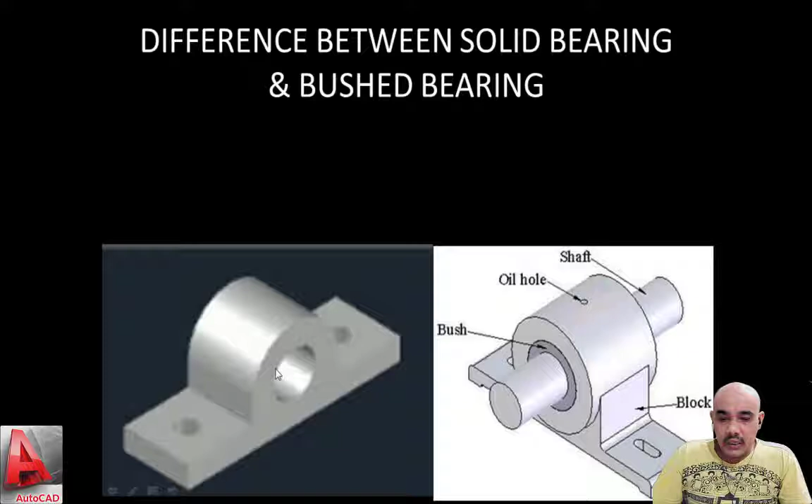In our previous lecture we have done solid bearing, and let's look at the difference between the solid bearing and the bushed bearing. This is the solid bearing. The solid bearing is of no use after it is worn out. But in a bush bearing, only the bush is replaced, and we again use the bearing.

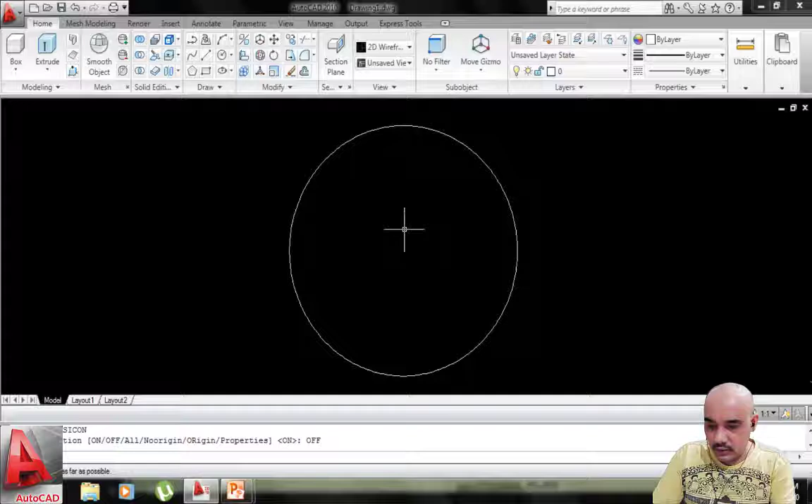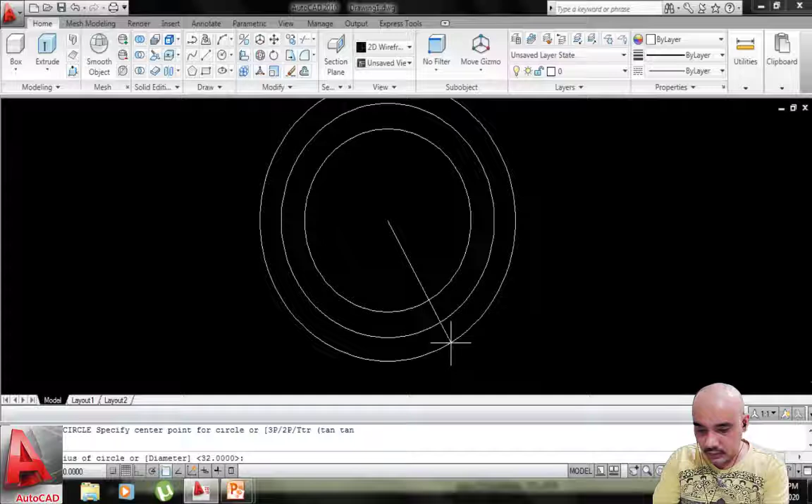I opened the AutoCAD interface. This is the interface of AutoCAD. Let's draw a circle of dia 50. Okay, let's turn the UCS icon off. Z enter, A enter for zoom in, zoom out, and draw another circle of dia 64, and draw another circle of dia 96. We have drawn these 3 dias.

Okay, then draw a center line here. Let's switch the ortho on. Draw this line, offset to the distance of 35, and again offset the distance of 25. Okay, and draw a center line here, offset 160 divided by 2. Okay, then we have drawn this. Let's extend this. This is 35, this is 160. We have prepared this diagram, and after this offset of 35.

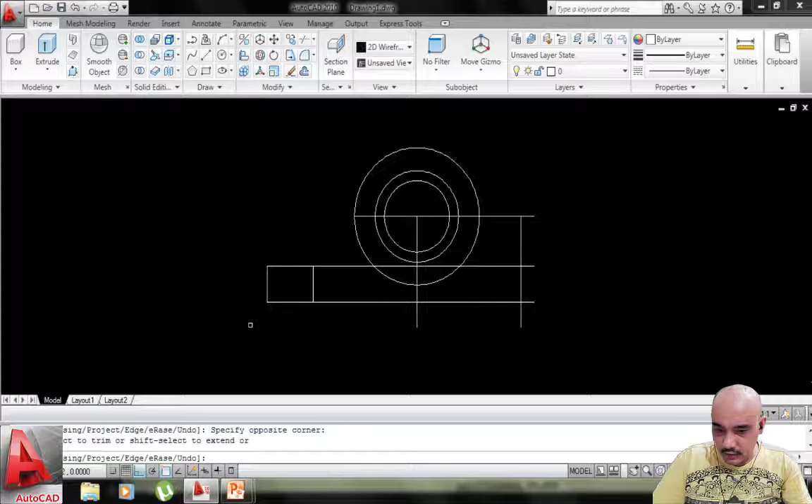Okay, and extend these lines to this boundary. Then trim the necessary lines. And similarly offset a distance of 35 from this side also, extend this line to this boundary and trim the unwanted lines. Okay, we have prepared this.

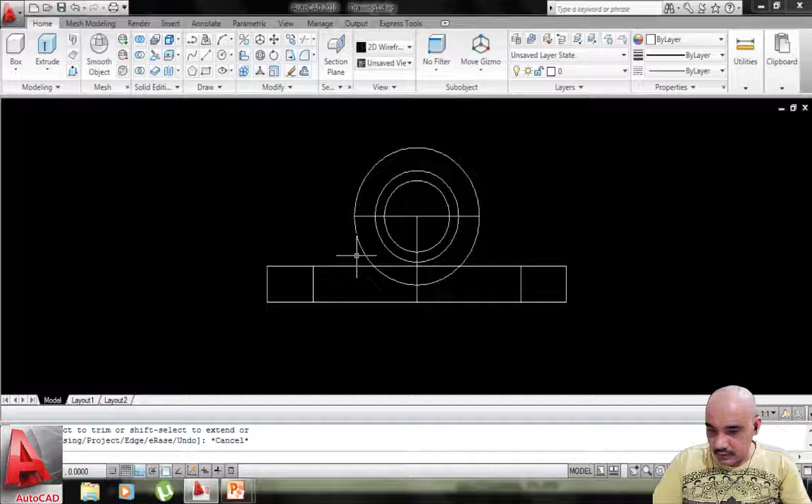After this, draw a line here. Then fillet, specify radius of 6, and the 6 radius fillet is drawn. Again the line is drawn from this end point to this point, and again fillet radius 6. Okay, we have prepared the front view of the bushed bearing.

After this, extend this line: EX, enter, select this boundary, space. The line is extended to this circle boundary. After this, offset of 4 and offset of 2.5 to draw the oil hole.

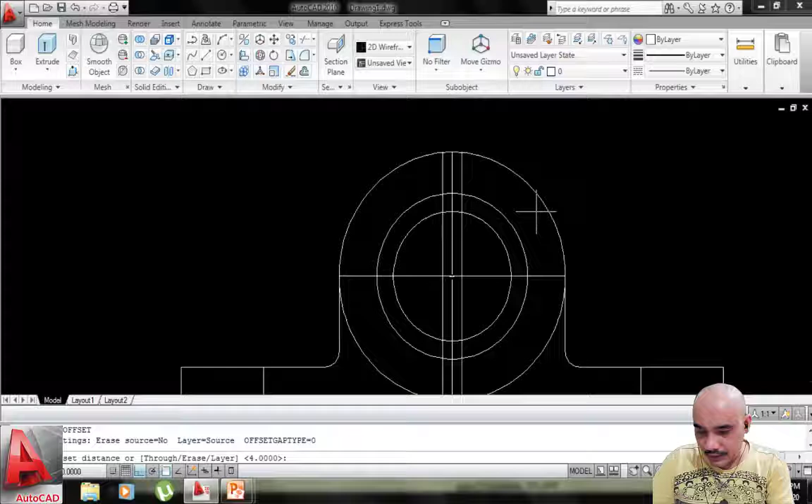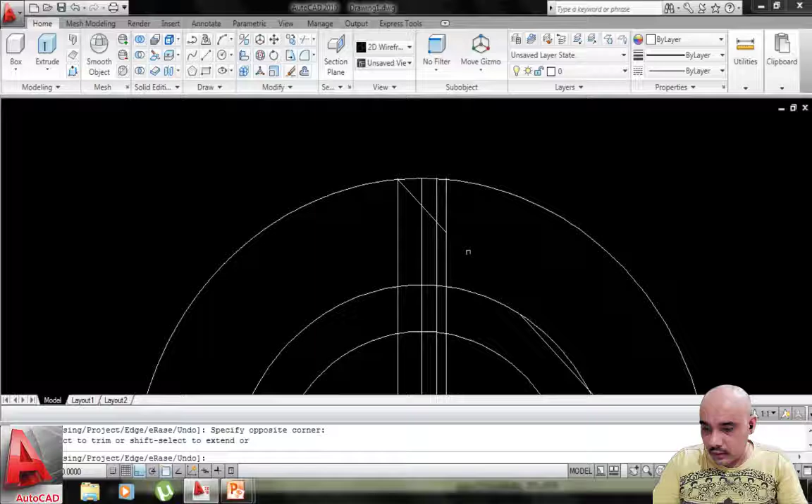Draw a line XL at angle minus 45 degree, put it here, trim the necessary line and delete this line. Again we have used the mirror command here, trim this line also and delete this line. After this we use the mirror command and trim the necessary lines, and the oil hole is drawn.

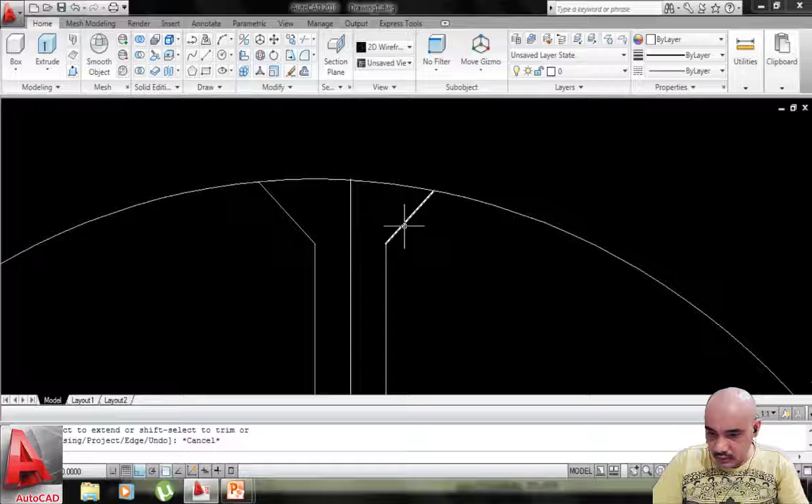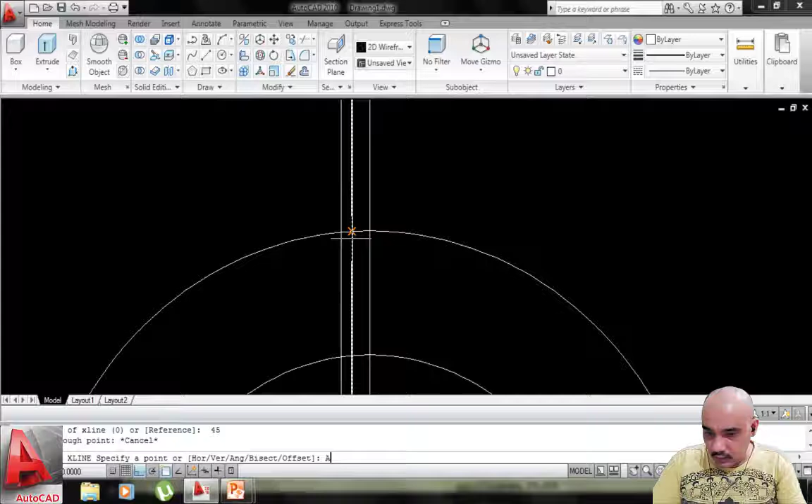Okay, let's extend this. Just wait. Draw this center line. This is not from the center. This is the center. Offset of 2.5 and offset of 4. Just erase this. Again use XL, angle minus 45 degree. Put this point here and trim the necessary line. Delete this and trim this up to this point. Okay, then mirror.

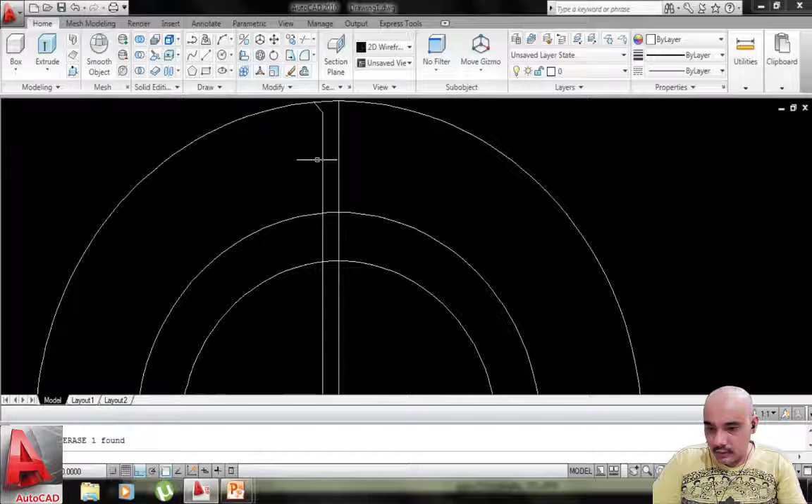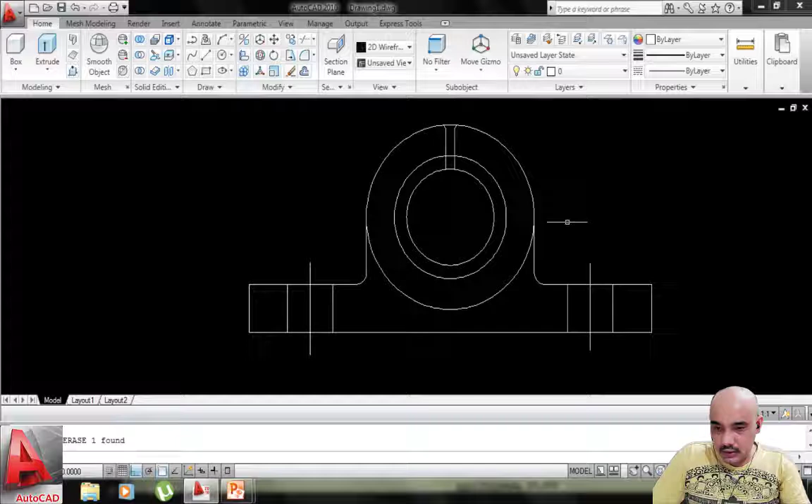Select the object. We have to use this hatching. We have to just draw the line of section. The preview is not clear, so we have to increase the value of the scale. In user defined, I have to use custom spacing.

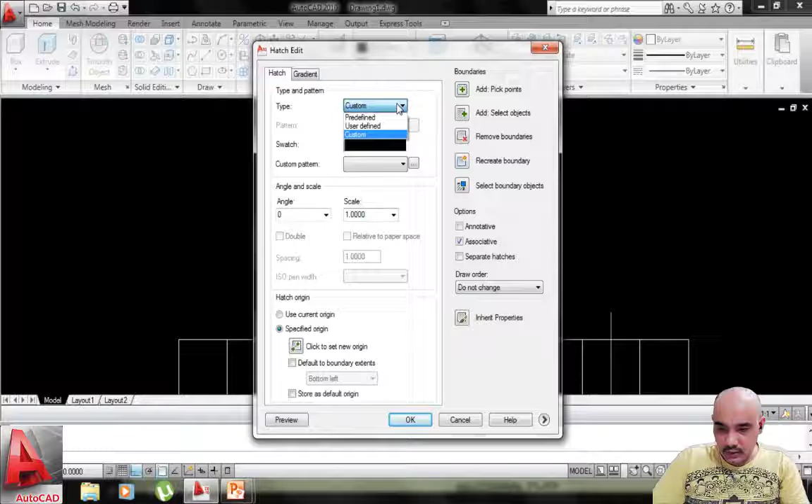And this sectioning is done here, and next we have to section, just offset the distance of 3, okay, and trim this line, just offset about, this is 76, so we have to offset. We have to draw a line here, XL angle of 45 degree, just put it here.

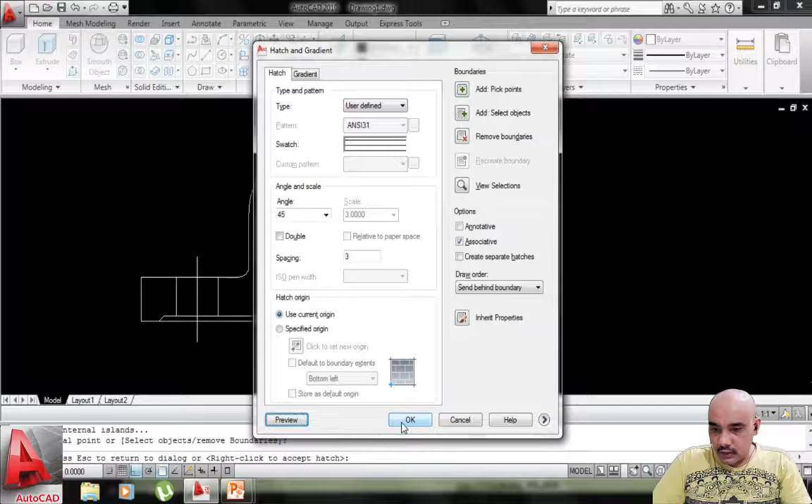And preview. Sectioning is done. Okay, now this is the different material, and this is cast iron, this is gunmetal. So with sectioning we have to show two materials. Then again go to sectioning, change the angle 45 to minus 45 and just preview. In this way we can show two different materials with the help of sectioning.

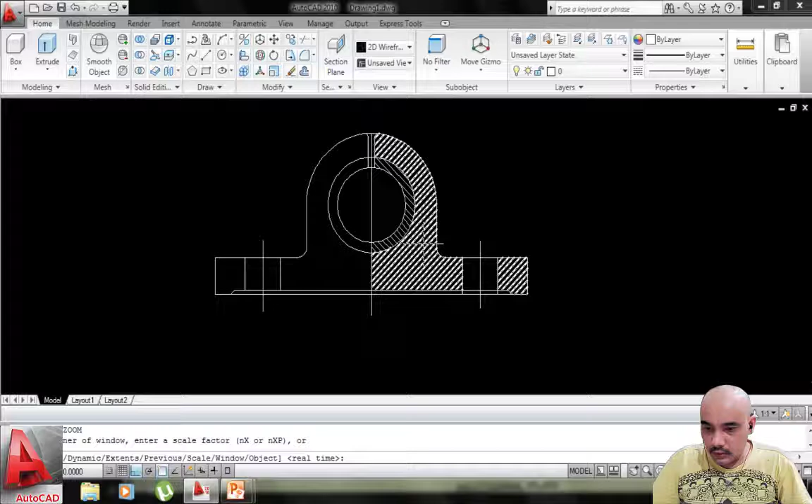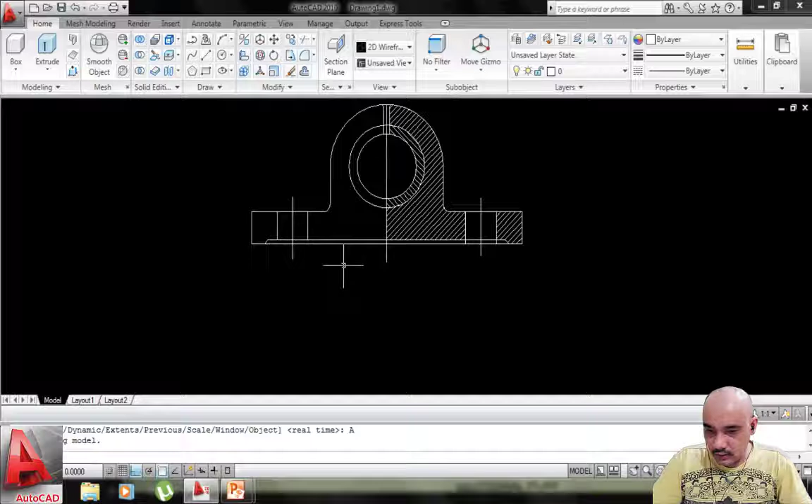With the help of line we can project projections. Just draw the projections from the circles. Okay, and draw this projection also.

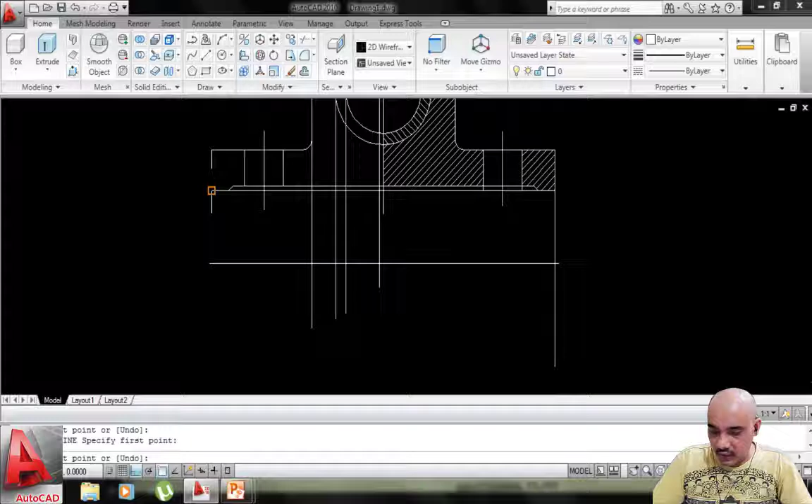This distance is 76, this distance is 76 and this distance is 96. So we have to draw this, offset the distance of 76 and extend these lines to this boundary. Okay, and trim these lines as these lines are of no use.

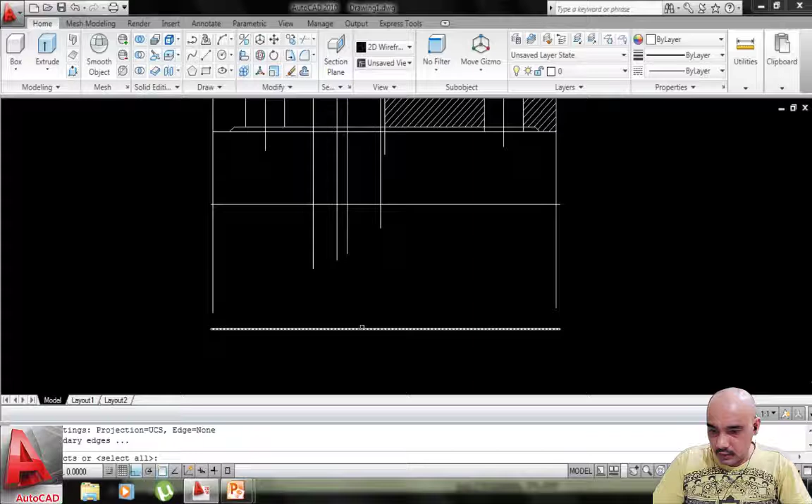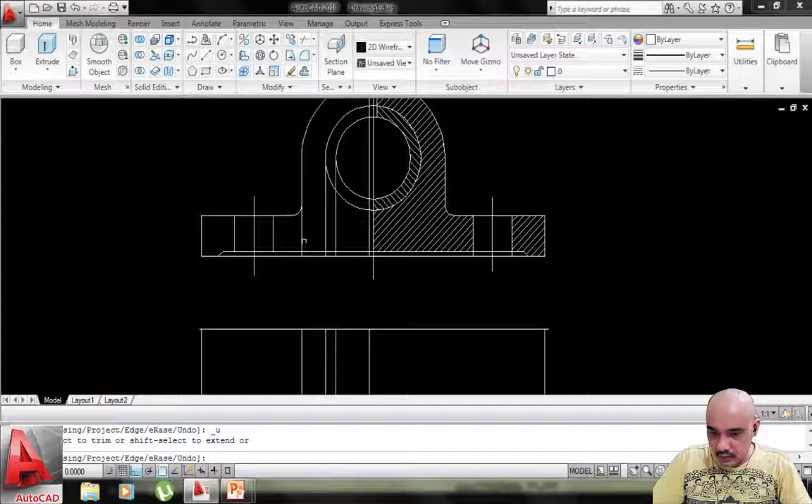Okay, then again mirror about this. We have to show the section as we have a sectional plane, so we have to show these lines in section view. Again go to hatching, use 45 degree, pick point, preview. And we have to show the different material here, the bush which is made of gunmetal. Again hatching, change the angle to minus 45 degree, click this and preview. Okay.

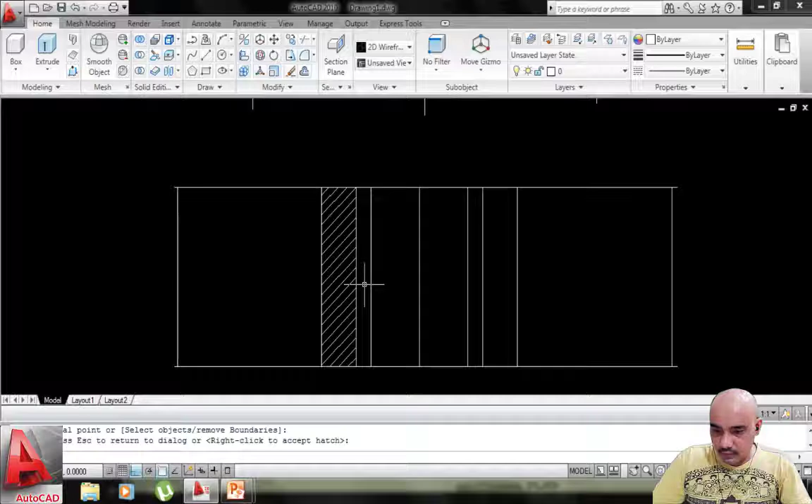We can erase these lines and directly mirror this. Okay, then this is 76 but this length is 96, so we have to offset 10 more on both sides, offset of 10 to this side and to this side, and again extend these lines to this boundary.

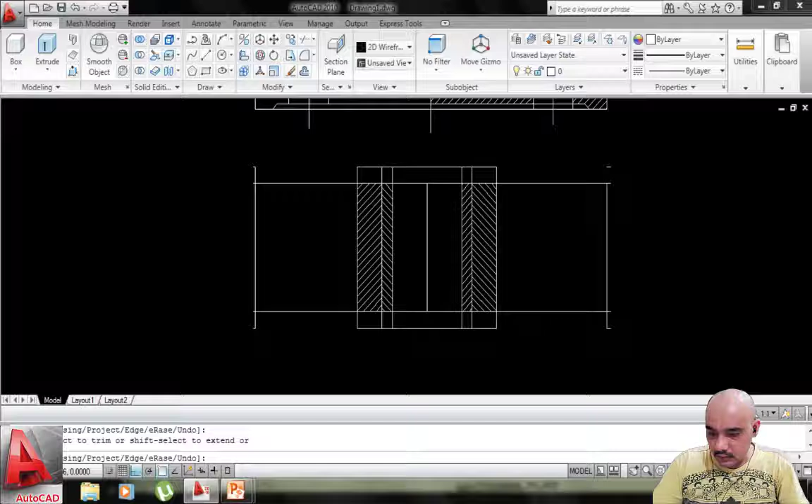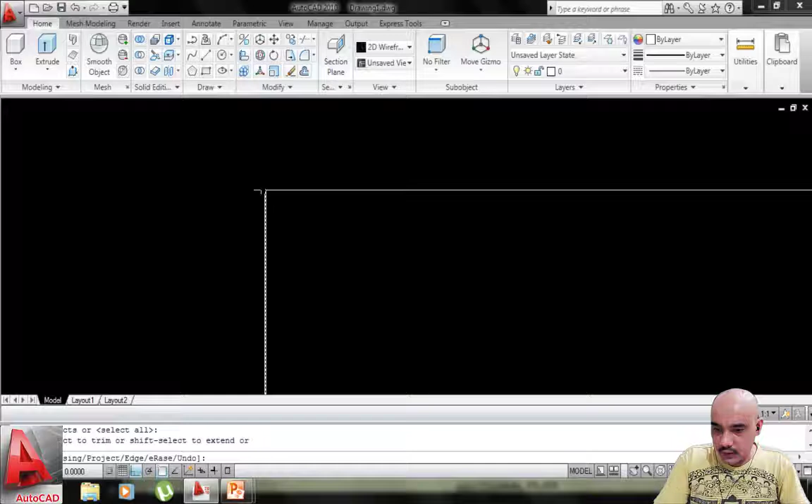Okay, then trim this, this, trim this. Okay, and we have to section this also, so we have to erase this, as we forgot this step before doing hatching.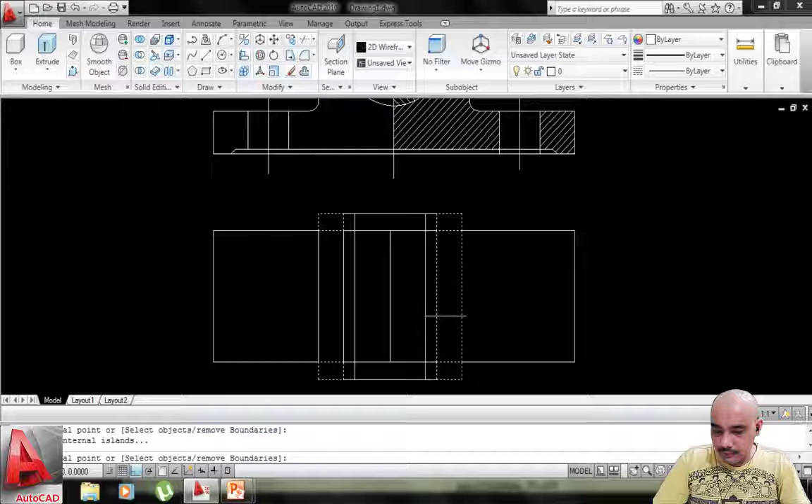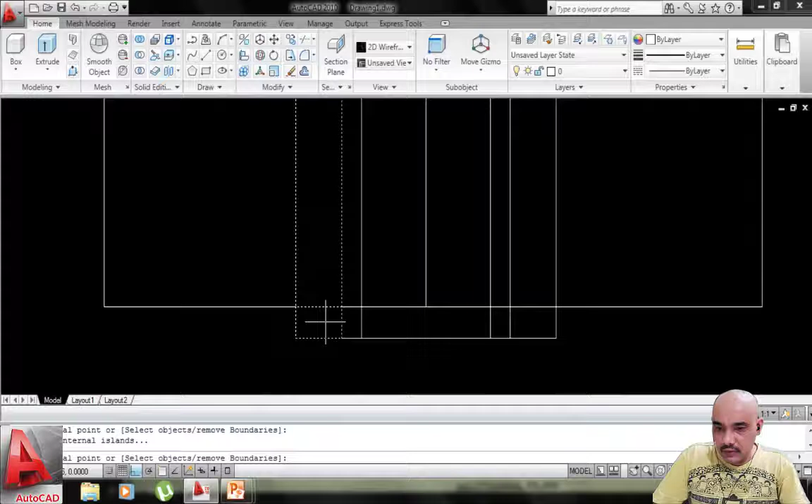Okay, and again minus 45 degree. And again use this command, put 315 or minus 45 degree. Okay, in this way we can draw this.

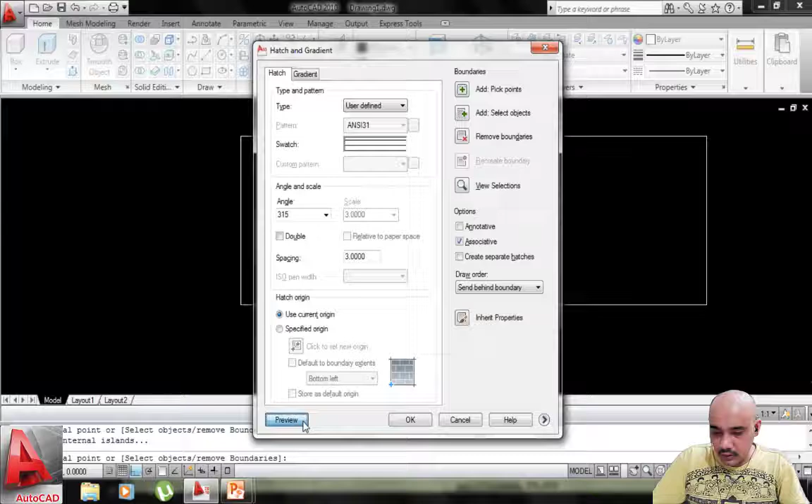Now take the projection of these. This is the projection here, and with its help we can draw this. Draw the center line, offset of 8 on both sides. Okay, and this. And just trim.

We have to draw the circle, tangent, tangent, tangent. Again draw this circle, and trim.

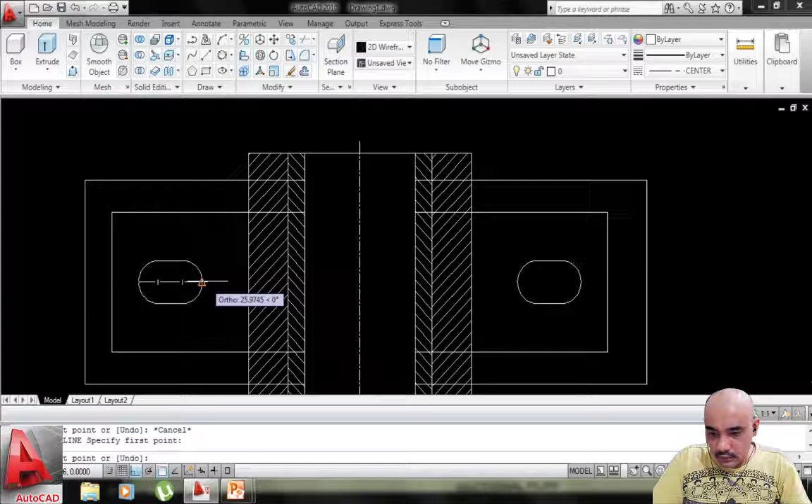ये भी सेंटर ठीक है। अब थोड़ा सा इसको हम कलर, अगर कलर चेंज करना हो तो कलर भी आप दूसरी तरह सेंटर का दे सकते हैं।

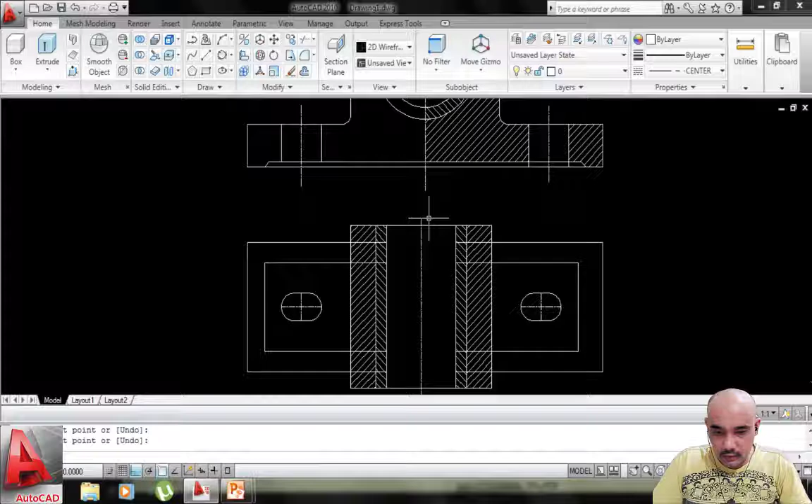सभी लाइंस को सिलेक्ट कर लो, बाय लेयर में जाकर ग्रीन कलर कर दो, तो जो सेंटर लाइन है वो हमें ग्रीन कलर में दिखने लगेगी। अब जो ये हिडन है, इसको हिडन लाइन से शो करना है। अगेन अदर में जाना है,

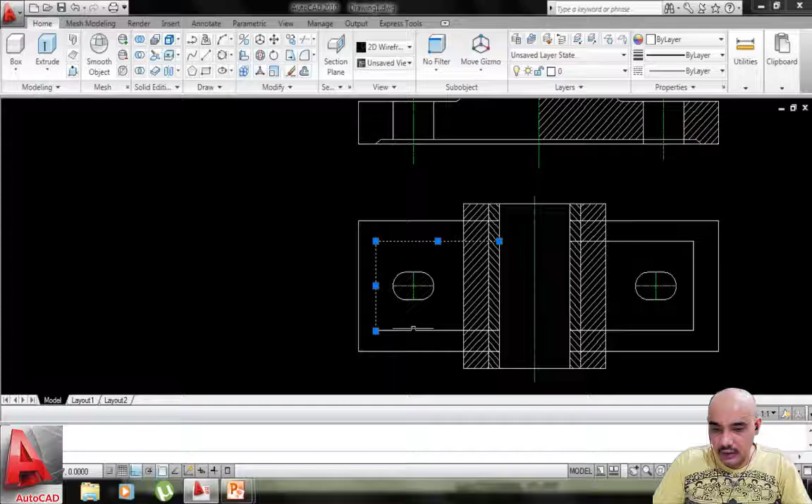लोड में जाकर हिडन, ओके, दिस इज हिडन। शो डिटेल्स में जाकर ग्लोबल स्केल फैक्टर को इन कर दो, ठीक है। अब इसको जो हमने हिडन करनी है इसको हम हिडन से जस्ट क्लिक ऑन दी लेयर एंड मेक इट हिडन, ठीक है, ये हिडन है। अब इसकी तरफ से ये भी हिडन होगी, ठीक है।

ठीक है, क्योंकि वो लाइन स्प्लिट करनी पड़ेगी। ये हिडन हो गई और इसको भी बाय लेयर्स में जाकर इसको भी। अब इसका भी कलर हम चेंज कर सकते हैं हिडन का। जस्ट सिलेक्ट दी हिडन लाइंस,

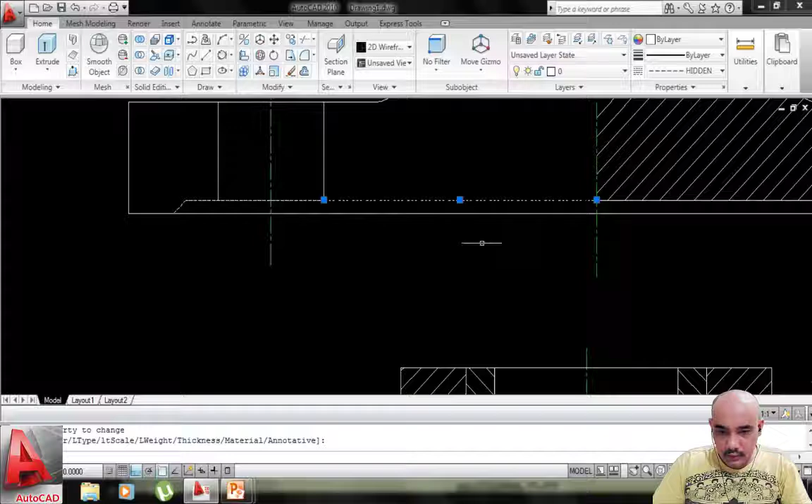Just select and change the color to blue. These are the colors, ठीक है।

और यहाँ पर हमने फिलेट लगानी थी, इसको कर देते हैं फिलेट रेडियस 6।

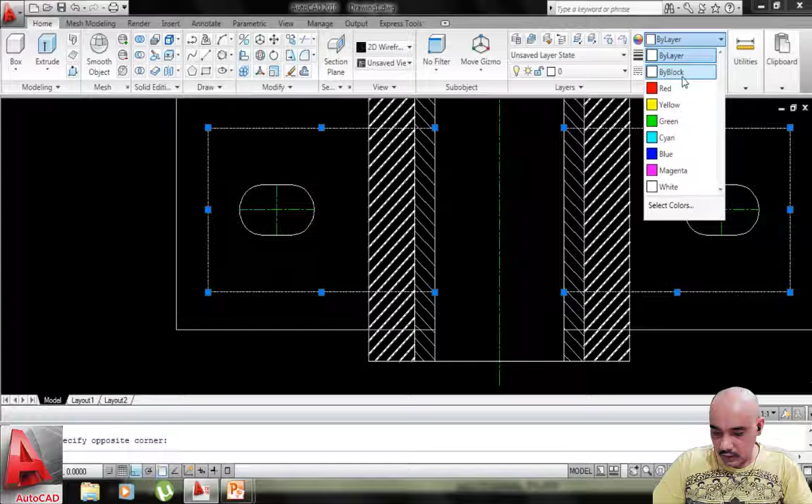अब देखिए ये प्रॉब्लम आ गई है। अब क्या मैं करूँगा, इसमें एक सर्कल हमारे पास ऑप्शन है TTR, इससे टेंजेंट और रेडियस 6, ठीक है। इसको हम कर लेते हैं कंटिन्यूअस।

अब इसको ट्रिम कर दो, ठीक है, ये गया, ये लाइन को ट्रिम किया। और सिमिलरली अब मिरर कर दूंगा, मैं दोबारा नहीं लगाऊंगा। एक सेंटर से यहाँ मिरर हो गया, ठीक है। अब इसको ट्रिम कर देंगे, ठीक है।

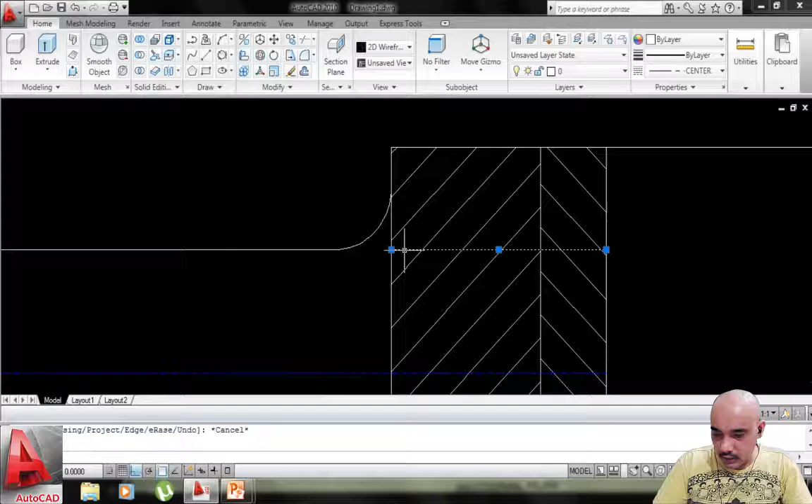ये लाइन एक्स्ट्रा है, इसको डिलीट कर देंगे। फिर हम मिरर यूज कर लेंगे, ये और ये। क्लिक किया, सेंटर लाइन से मिरर किया, ओके। ट्रिम कर दो इसको,

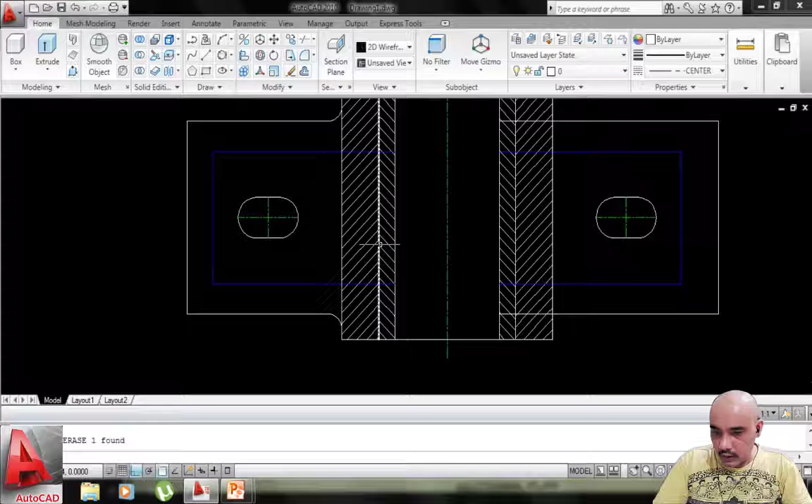दे दिया, और ट्रिम दिस आल्सो, ठीक है। ये हमारा व्यू तैयार हो गया। इसी तरह आपने इसको शीट पर बनाना है

और ऑटोकैड पर भी प्रैक्टिस कर सकते हो, ठीक है। अब इसकी डायमेंशनिंग कर लेते हैं हम।

First of all we have to do the center distance, this is the, we have to change this to continuous and linear.

The dimension size is very small, text size is very small, so press D. A dimension style manager is open. Go to modify command, go to text and increase the size to 5, okay.

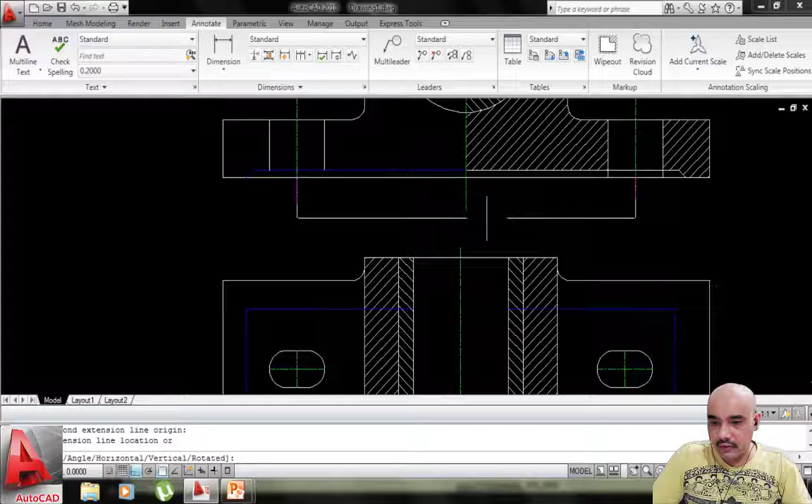The settings of this dimension style manager I have explained in the previous videos. You can see that, and just set current close. The size of the dimension will be increased.

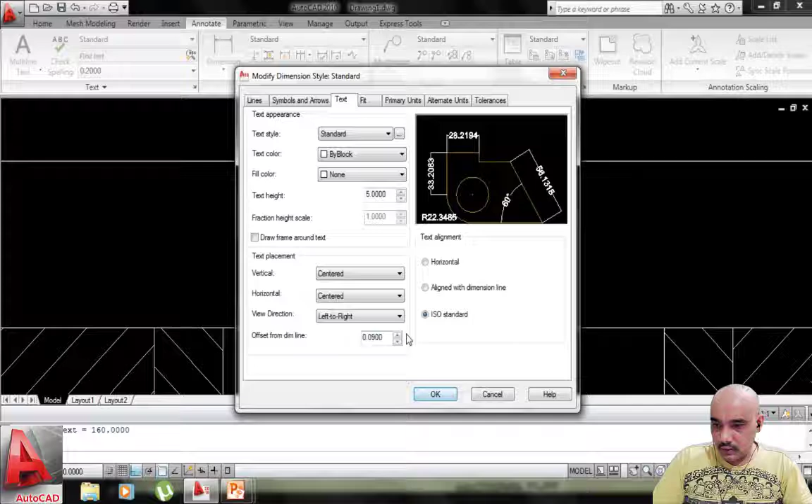Now again go to D, modify, and go to primary units, precision, make to 1 or up to 0, okay. Set current close, okay.

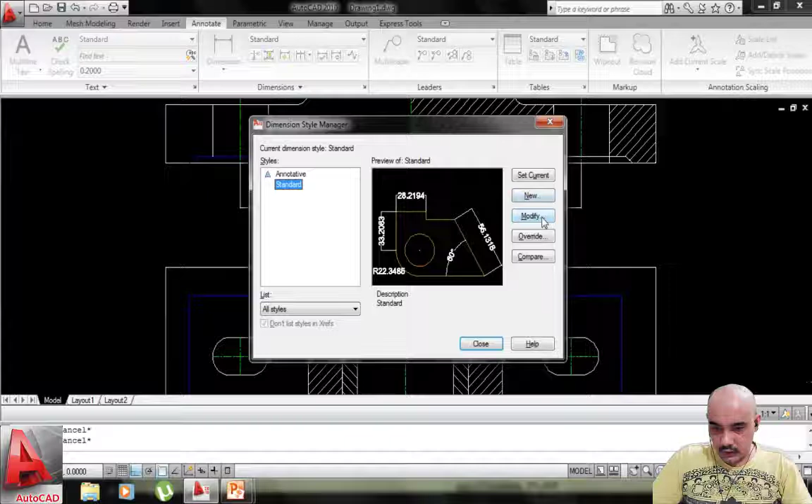Now make this dimension to 25 and make this dimension from here is 35, okay.

Now this is the radius 48, and if we have to show the dia, this is dia 50, and again go to radius, this is radius 6, okay, and this is the distance of dia of 26, and we have made this

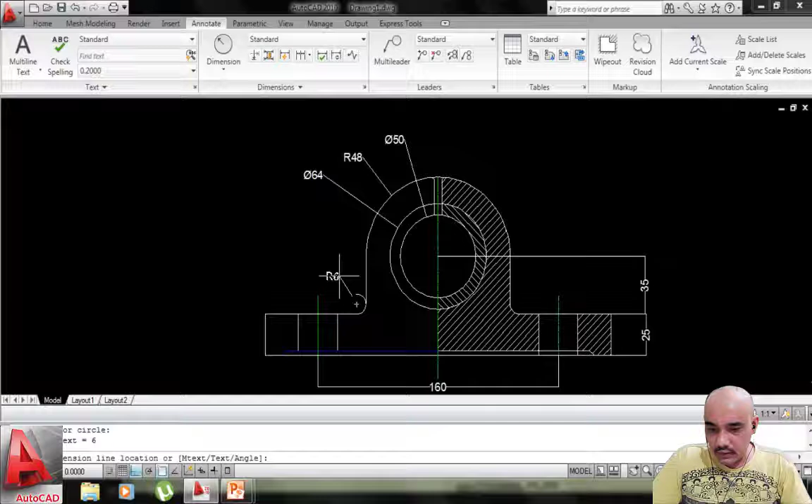35, okay, and again distance from this side is 96, distance is 76, and distance from here is 16, and this distance is 26, okay, and this distance is

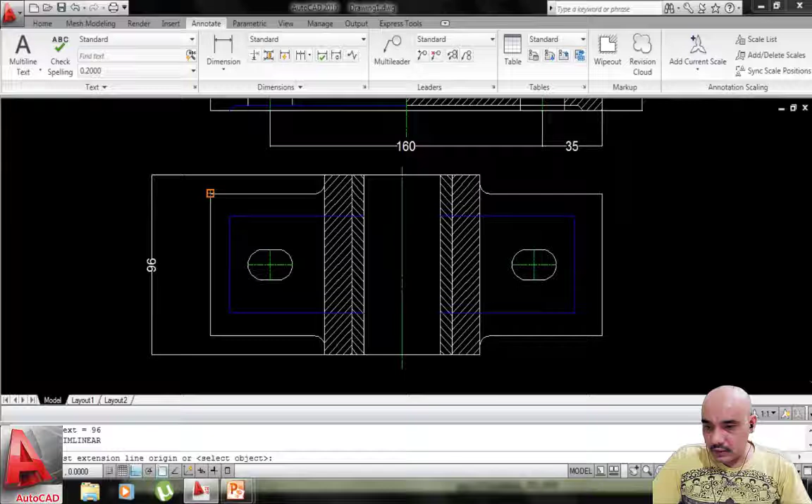linear dimension dia of 5, ठीक है। ये हमने पूरी डिमेंशनिंग इसकी कर दी। अब हम इसका साइड व्यू बनाएंगे। साइड व्यू में क्या होगा, ये देखिए, ये हमारा साइड व्यू है। जस्ट वी हैव टू टेक द प्रोजेक्शंस टू

दी लेफ्ट हाफ इन सेक्शन सीइंग फ्रॉम द राइट साइड।

Okay, just draw this, take these projections,

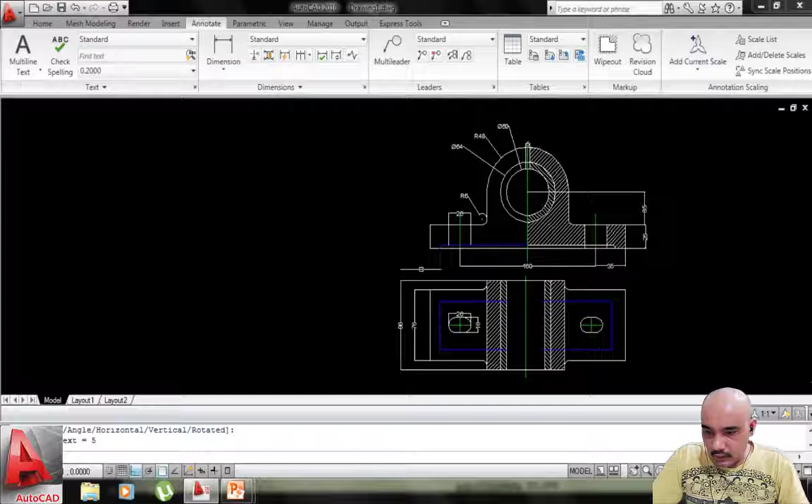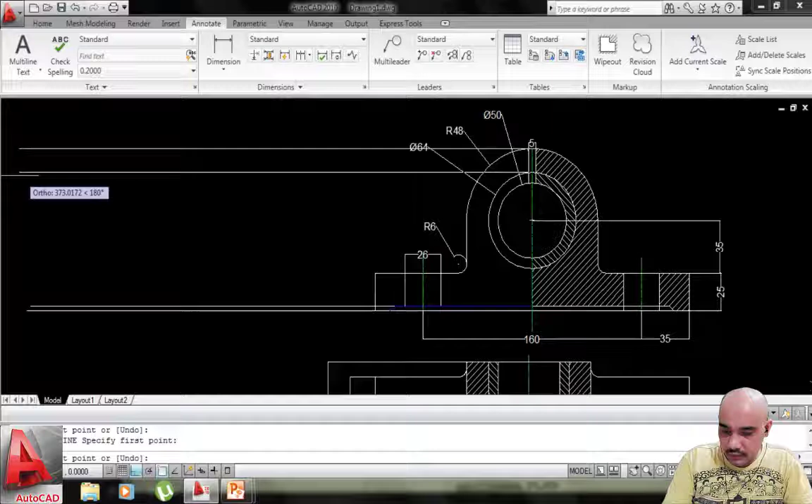draw a line here, and offset of 96 की लाइन ऑफसेट करिए, फिर ऑफसेट ऑफ 76, ठीक है। अब जो फालतू लाइन है उन्हें हम ट्रिम कर देते हैं, ठीक है।

ये दिखना है, तो एक सेंटर लाइन से पहले 76 का हाफ का ऑफसेट करें, फिर 96 का ऑफसेट करें हाफ। ऑफसेट ऑफ 76,

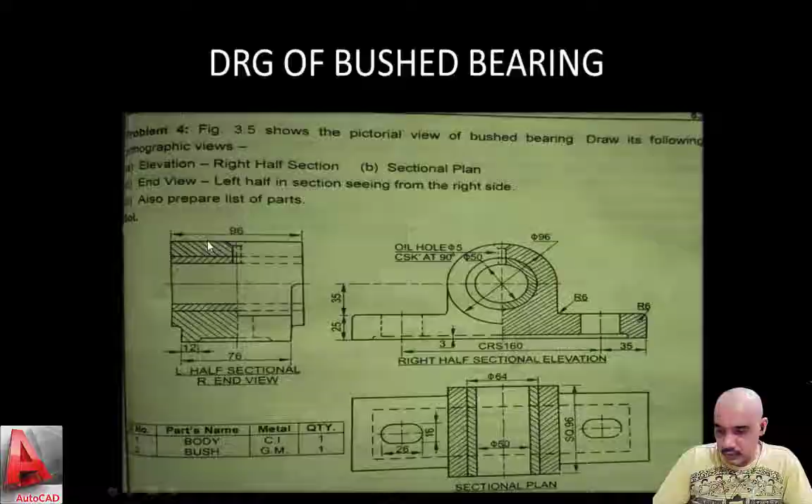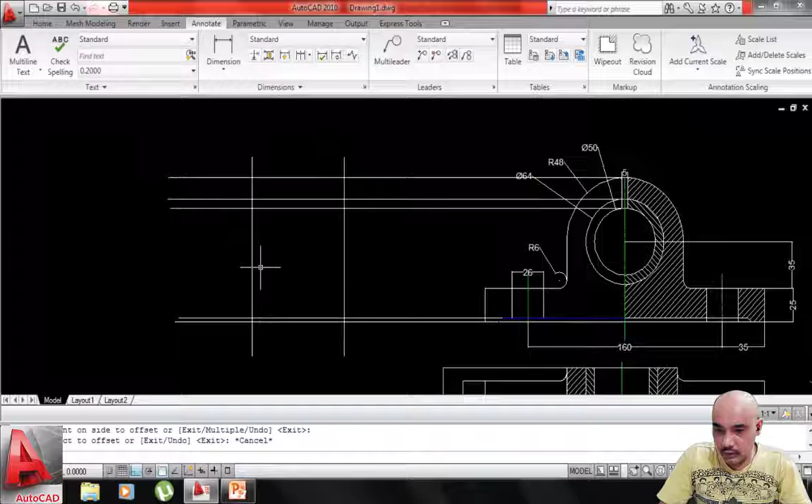थोड़ी सी कंप्यूटर में प्रॉब्लम आ गई थी और हैंग हो गया था, सो दैट्स वाई वीडियो को स्टॉप करना पड़ा था। हम यहाँ पर पहुँच गए थे, ठीक है। अब इसको क्या करना है, मिरर,

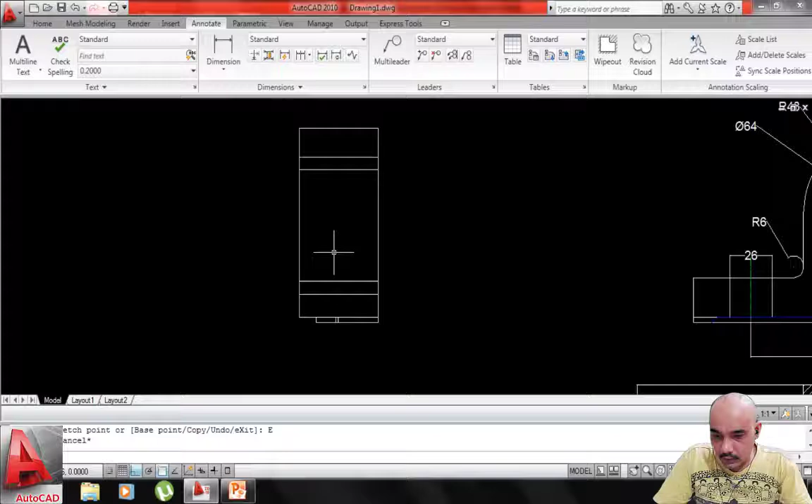ये पूरा मिरर कर लेना है, ठीक है। ये भी लाइन, अब क्या करना है, इसको ऐसे निकल कर, ठीक है। ये सेंटर लाइन बन गई। अब इसका एक लाइन हमारी

यहाँ से यहाँ तक, जैसे यहाँ से यहाँ तक लाइन शो करनी है। अब इसको हाँ, ठीक है, तो इसको डिलीट कर देते हैं। ये डिलीट किया और ये,

ठीक है। और ये हमारा अब यहाँ से रेडियस देना है हमें,

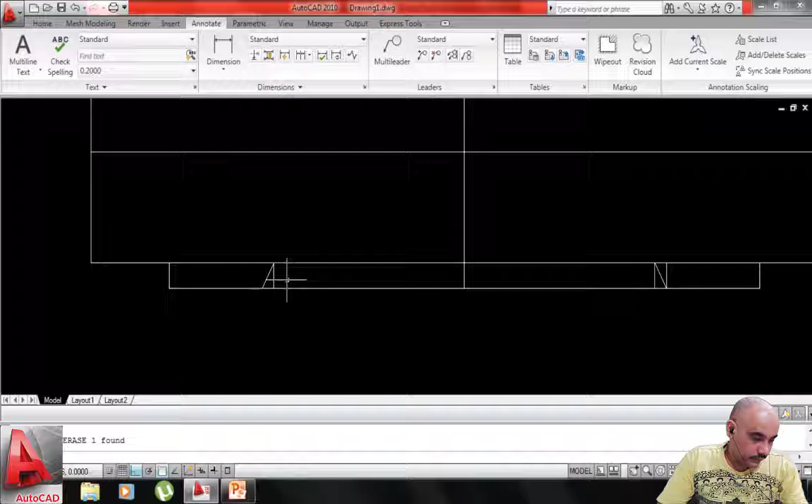थर्टी 35 और 25 को ऐड किया, तो ये हमारा बन गया ठीक है। अब हैशिंग सेम इसमें भी हैशिंग कर देंगे। इस

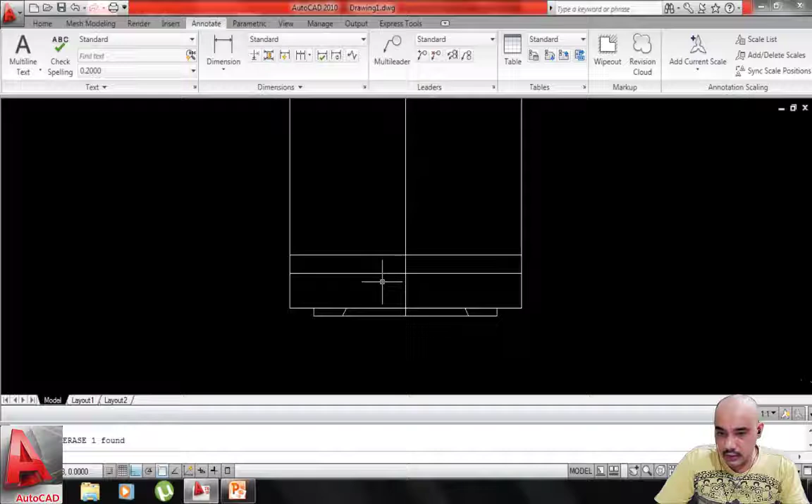45, इसको -45 कर दीजिए। इसका 45 कर दीजिए। ठीक है, ऐसे शो

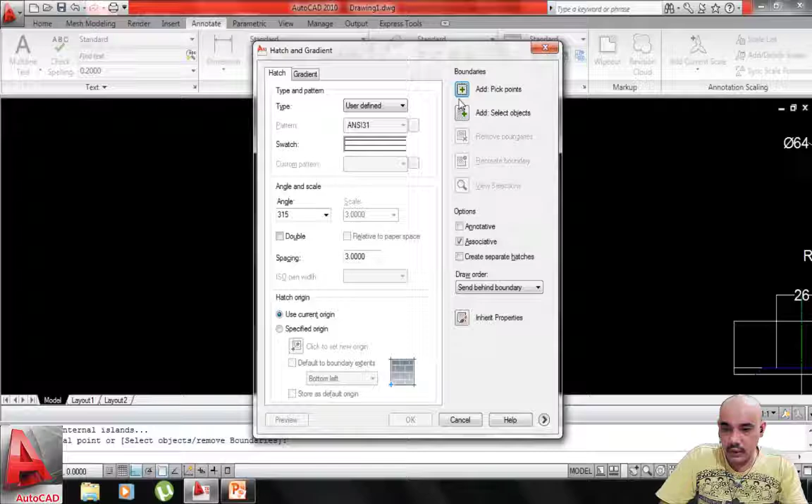डिफ्रेंशिएट हो कि ये डिफरेंट मटेरियल है और ये डिफरेंट मटेरियल है। So

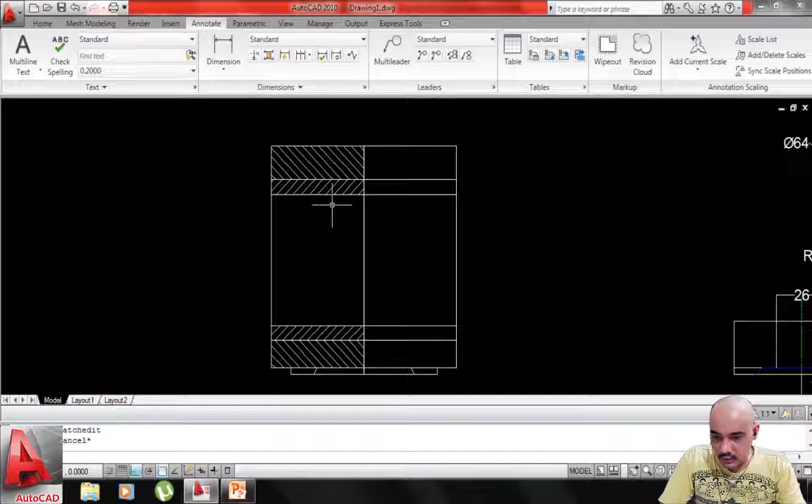make this dimension 96 and this dimension is 76 and this is 12 and this dimension is 3 and we have to show here 3

and draw a center line here also। थोड़ी सी बड़ी कर दो।

अब इसको क्लिक करें और ऊपर जाकर प्रॉपर्टीज में जाकर सेंटर लाइन। ठीक है, ये हमारा पूरे एक बुश्ड बेरिंग इन ऑटोकैड हमने तैयार कर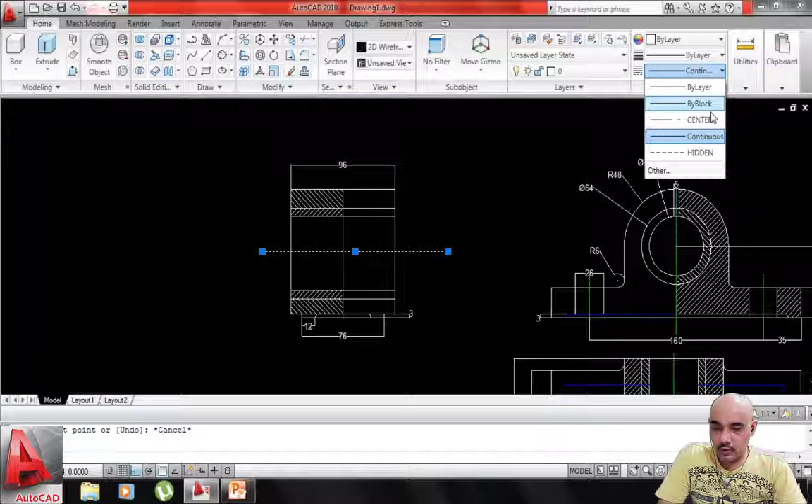चुके हैं और इसको आप अपनी ड्राइंग शीट में भी बना सकते हो और इसको आप AutoCAD with the help of software you can draw it in AutoCAD also। So

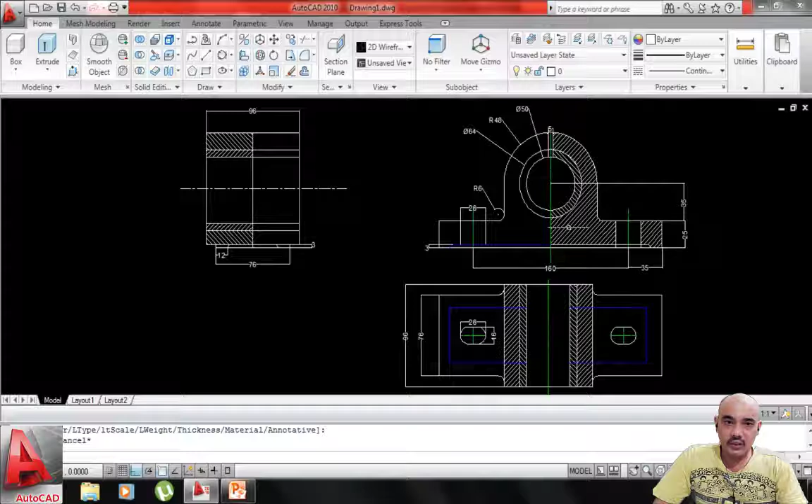This is the main drawing, so I have to complete this. Then also you can draw a table and also write the text for this, as I have explained the text, how to write the text in the AutoCAD. You can see my previous videos also। So thank you।